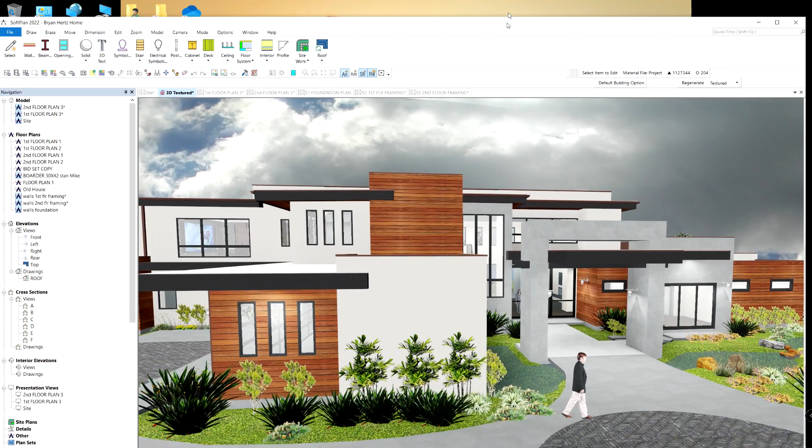So here's the latest. This is changing things back here. This is the last list that you gave me, so I went through it, and I'm going to forego all the fancy lighting just so you can see what we're doing.

We've got those windows. I did finally find a door that I liked there. With this door, it has a man door here, so that's a swing door, but it also slides. I've seen those, a couple of companies make those, but I don't know if your guys do or not.

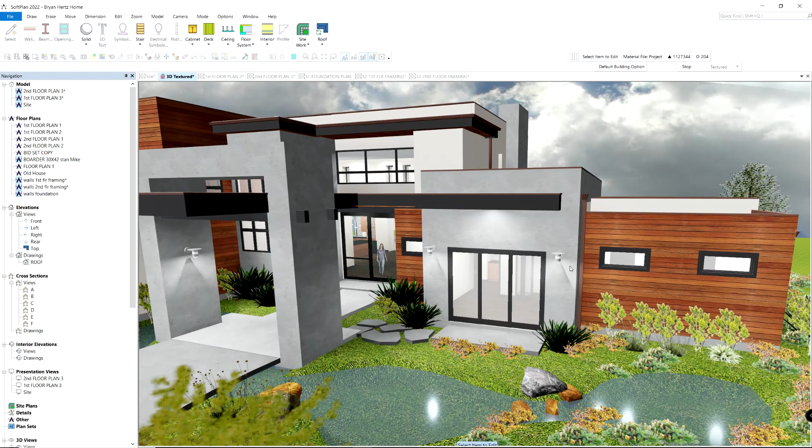And I'm thinking on their window list, it might behoove us to give them elevations that we want, because if they misinterpret how I wrote that down, I don't know what we're going to get. They have no idea what we want in there, really.

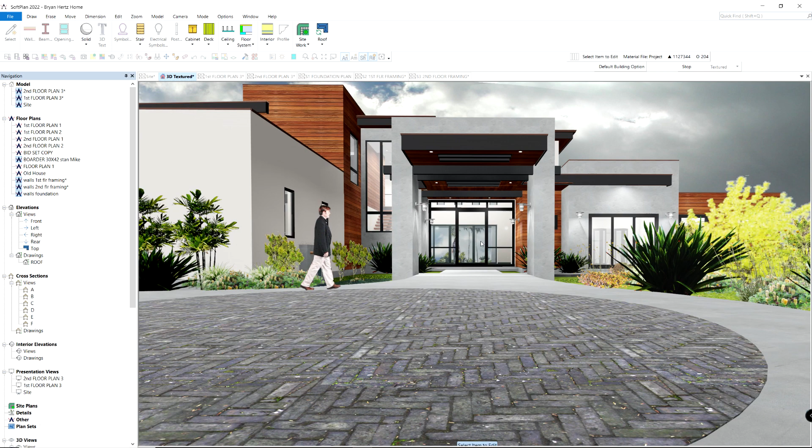I think that we're after something just like that. These two are awnings on the side here, so you get some kind of airflow through there. You've got your pivot door, and then up above you got fix, fix, fix, so these panels go through. And that's what gives us this header for this door here.

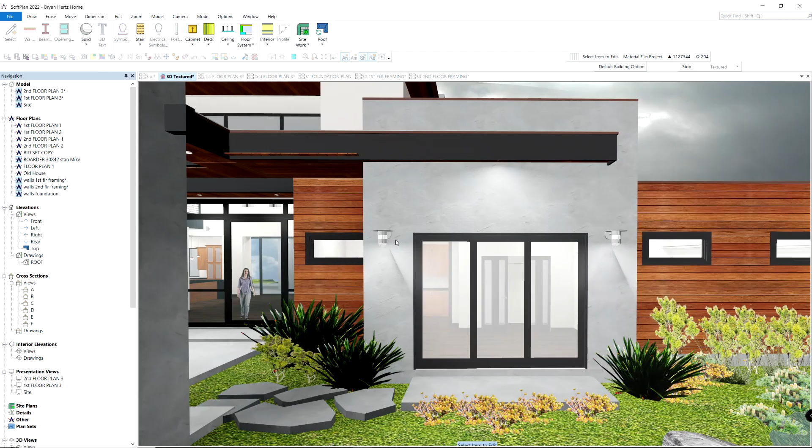I can do that. It would wind up on a separate sheet, but it might be worth doing, just showing what's a casement, what are going to be these awnings with a fixed window above.

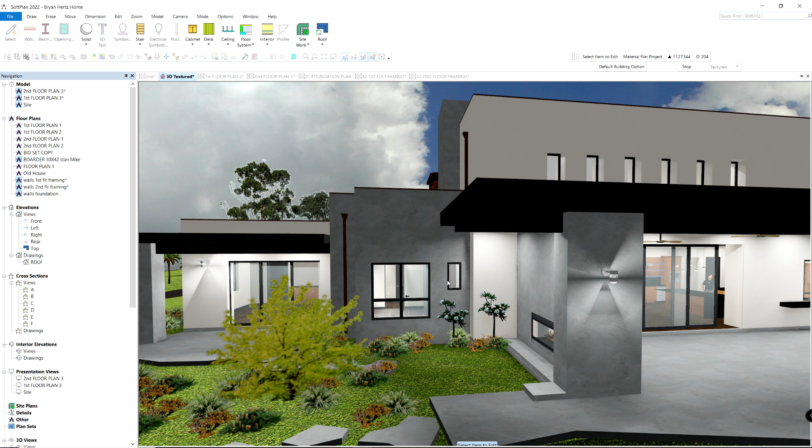Anyway, as we're going around here, hope you're noticing the changes. I changed this back, I made that a little more narrow and long, kind of keeping in keeping with what we've been doing. I think that looks good.

I think you and I are pretty much on the same page in most of this stuff. We're starting to get into your head on some of this.

I changed this back, and that works really nice. I like that detail, that's pretty cool.

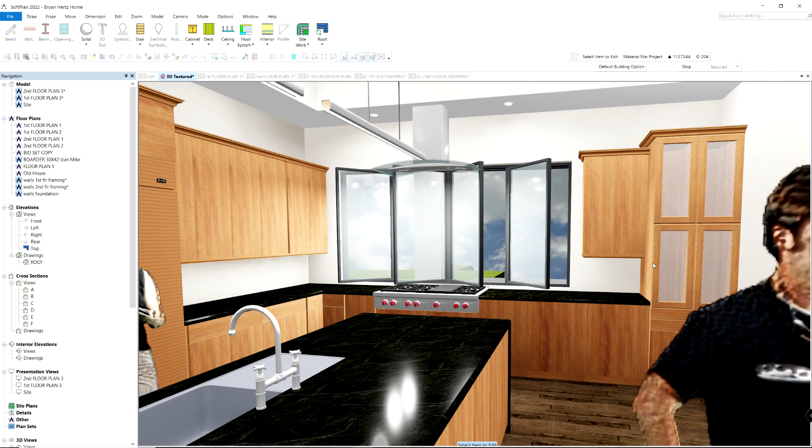So, oh look, my windows are all jacked up there. I'll have to fix that. But anyway...

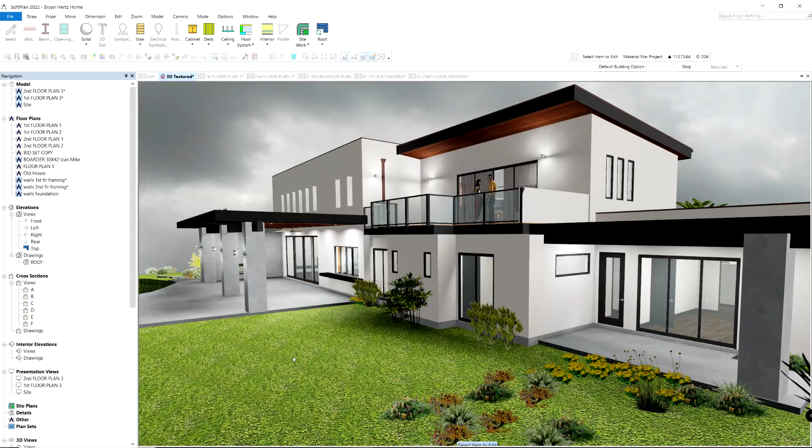Windows and doors back here. I got rid of the exercise yoga room just for now, just for this stuff. All these windows and doors, same, no change other than what we had talked about.

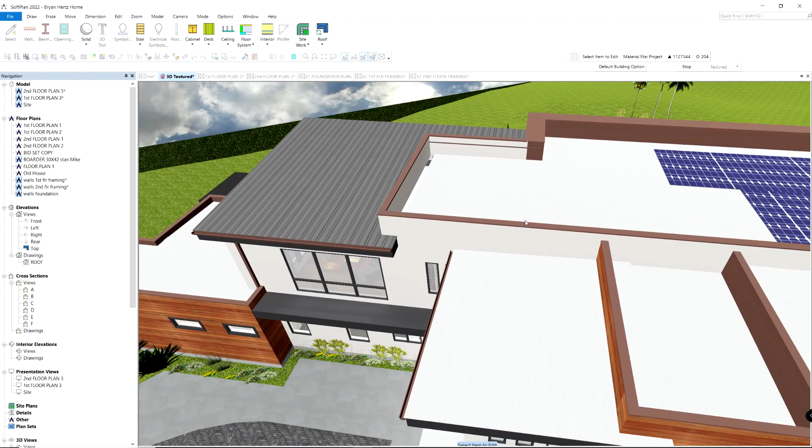So the deck area that I'm talking about—first of all, I like the way that this works, so I really don't want to change this. But here's the area that I'm thinking about converting to deck, and it's just right over this area right here.

So this would have a wall on it, this would be your deck area. If we wanted to make that bigger, well, you probably have to bring this wall out over this, or else it's going to look funny if it breaks in the center of that.

So here, let's see if I can move it. I don't think I can. I think I have to get in and redo it. Yeah, nothing drug with it. Let me see. Well, that's good enough to give you an idea.

And then you take this eyebrow—do you leave the eyebrow? It's too long to leave. I don't like breaking it over the middle of the window.

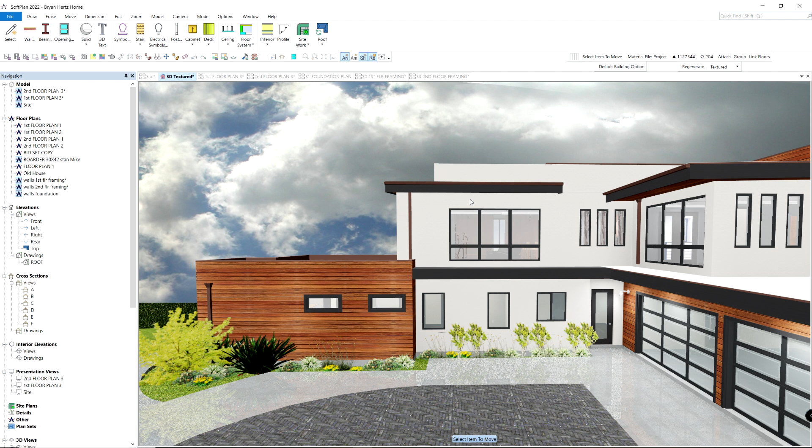Actually, I think to make this work, that deck, I'd have to come over this interior wall here, so this would be more like... come on... like that. And this, I can't move that without doing a whole bunch of hocus pocus, but yeah, I could stop that there.

I think it looks silly though. It's not substantial enough to really work. But with that, I could give you this whole area for a deck.

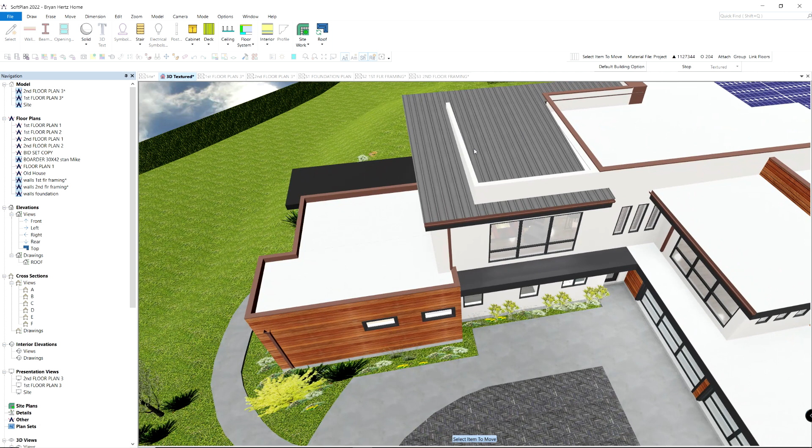And what's that going to do to us going down through there? So as you're doing this, there's your second floor framing I'm working on. So we're talking about bringing this deck over this whole area here.

Well, now you've got a wall here and a wall here and a wall here and a wall here that will support that deck up there. But you have to take those bearing points all the way through, all the way down to the foundation.

So we go to the first floor, which I'm just starting to lay out. This is the area that we're talking about right here. And that deck sits something like right about here. Let me just give you a graphic. So that deck is sitting right about here.

The difficulty I see of getting this down through, it doesn't have to line up perfectly, but I'd have to put a big beam in here, and then I've got to shear it off of this and this. That's not going to give me anything there. And I'm going to have to make that a shear wall anyway, at least a footing wall, because we've got this cantilever over here we've got to run these across from.

So big beams here that are holding up this outside wall. That's a big shear wall, but it doesn't transfer through. It transfers back here and here. Boy, I don't know. That's going to be a question for the engineer. I'm going to have to get him to take a peek at that.

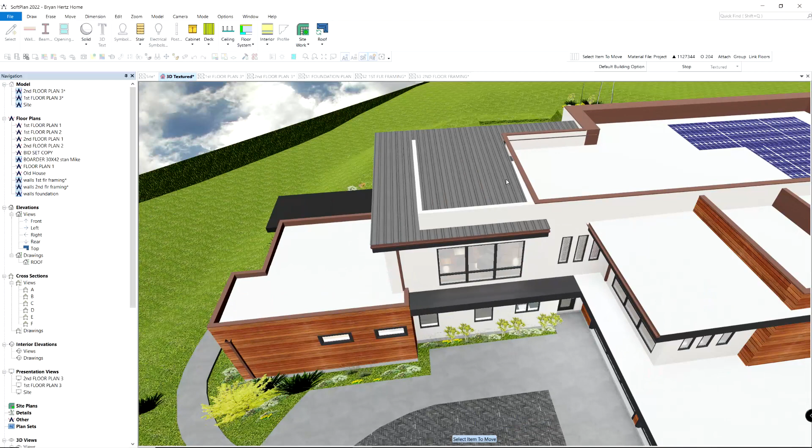That whole area, and the foundation coming down through, I'd say you're gonna spend 30 grand. That's not, I mean, that's with the structural stuff the engineer has to do, the actual footings you got to put in, the bearing points and the shear upgrades.

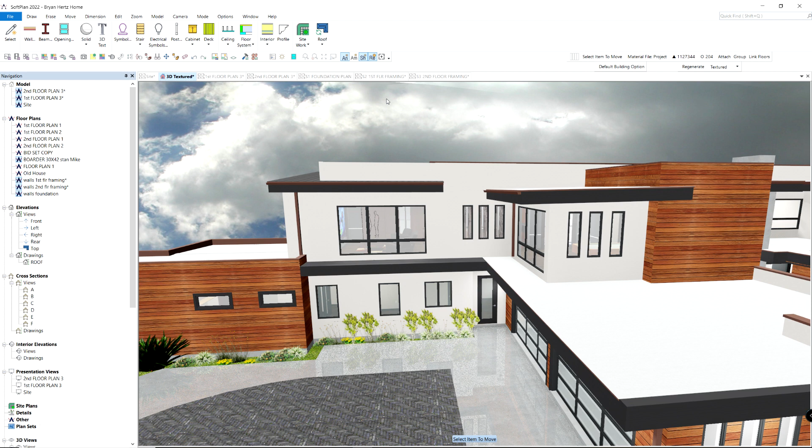Because like I said, he has to look at this as a third story. So when you're in a shaker, that doubles what this has got to take care of down here. It triples this, doubles this, because they're figuring a whole floor up above there.

I'd say it can be done. I think you're going to spend, sheesh, yeah, 25,000. If it can be done, 20 to 25,000 to get it to where you could do it in the future.

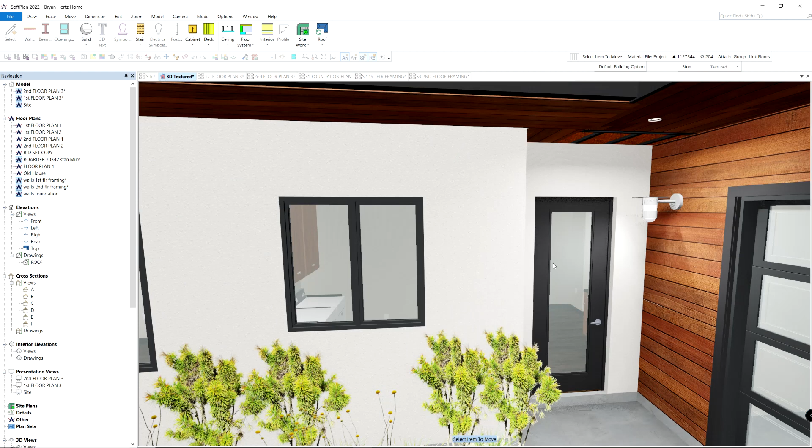Let me know if you think it's worth it, because that's a pretty big change right now. That's going to affect everything I'm doing as far as the structural stuff. And I've got to screw around with these elevations to see if it's going to work.

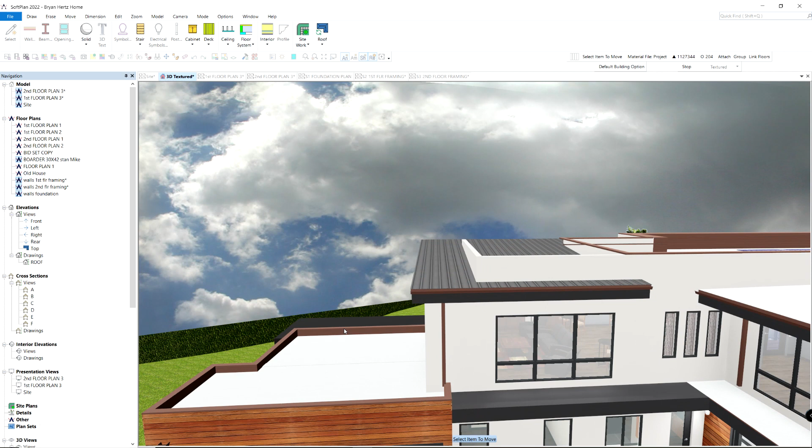I really don't like that. Here, let me try and put this back here.

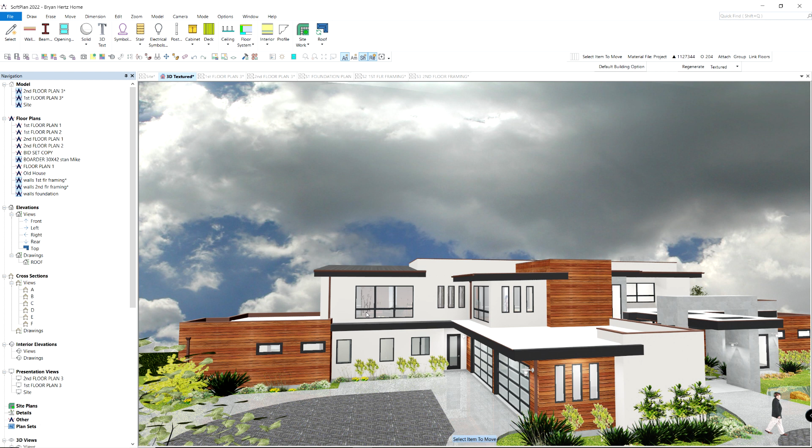What else could we do there? If that works with that, maybe we move this window and move these over. Move this down. I don't know. Anyway, that's where we're at.

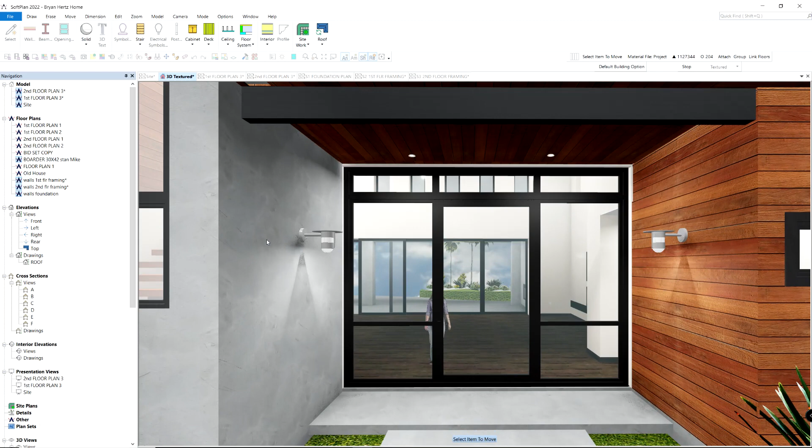Left the big window, I just threw some stuff in here for lighting. I like it, it's really coming along. There's your pool.

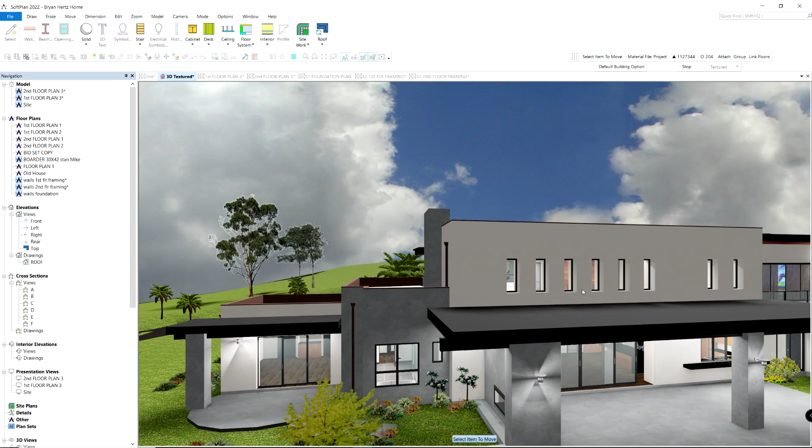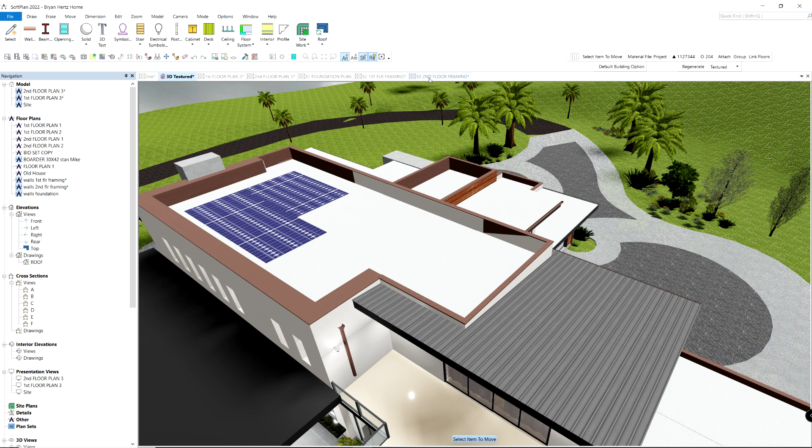Got this nice deck area here that, yeah, I know you want something up in here. I think this is your best bet. If you want to make this bigger than this area, so if we're looking at the second floor framing area, we're talking about this area right here. This would be the area I'm talking about without changing anything, but I'm not sure if we can make this work right here.

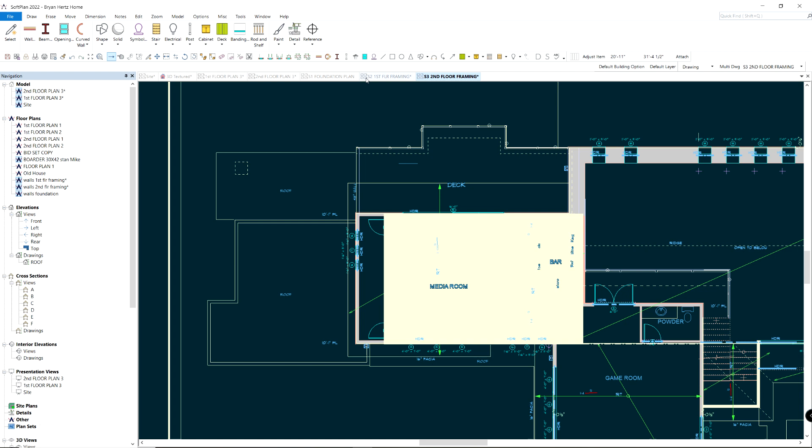That the engineer would have to look at. Yeah, maybe we could, maybe we're not breaking a surface here because I've got to sheet this and sheet this. He'd still use these to support it, but I have to run it by him. If you want to make it bigger, I think we get rid of the problem of breaking these two surfaces. But then the problem becomes this big area - how are we going to get it to transfer down through the building and work?

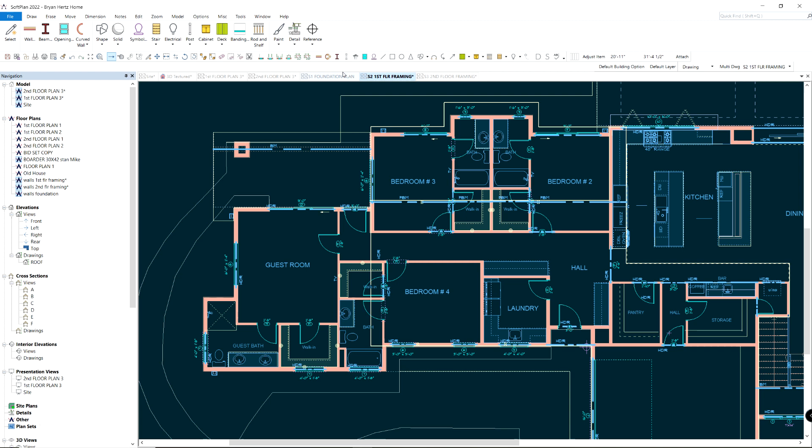Here I think I can transfer it no problem. I mean, well, I shouldn't say that - that's going to be the engineer's call. Yeah, let me know.

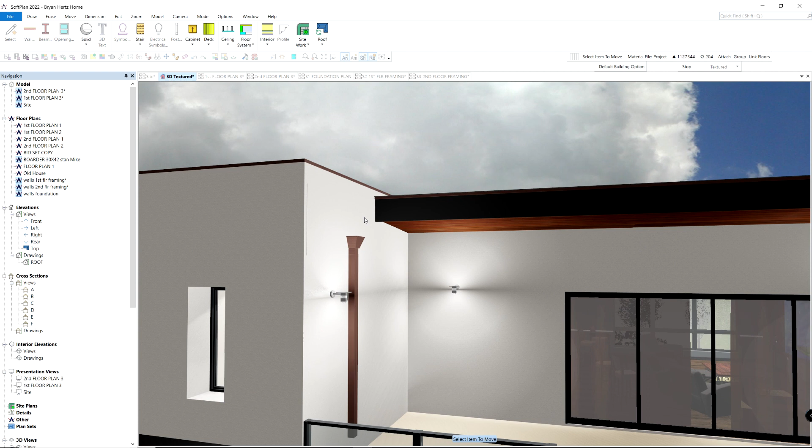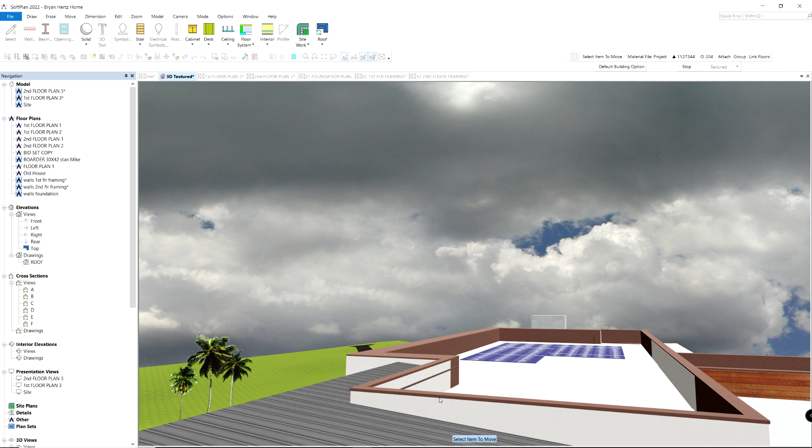Probably put a stairway in here, it goes up here. You could do a spiral - those are pretty dangerous, but I've done them before for roof decks. Actually, the guy that had the jacuzzi up top, he had a spiral. So you'd have a wall going across there, and these would have to be higher walls here to accommodate the railing. Railing has to be 42 inches, so you could either add on top of that, or it's probably how I'd do it, because you've got to have these for the roofing to work. So you'd add a bar or some type of railing on top of that, or glass, however you wanted to do it.

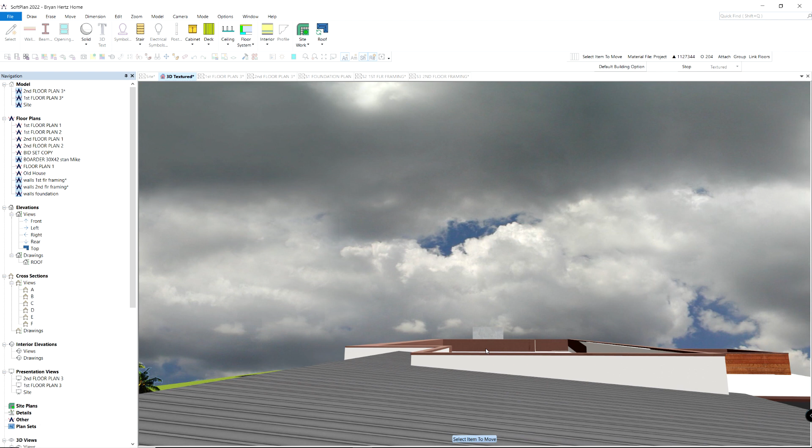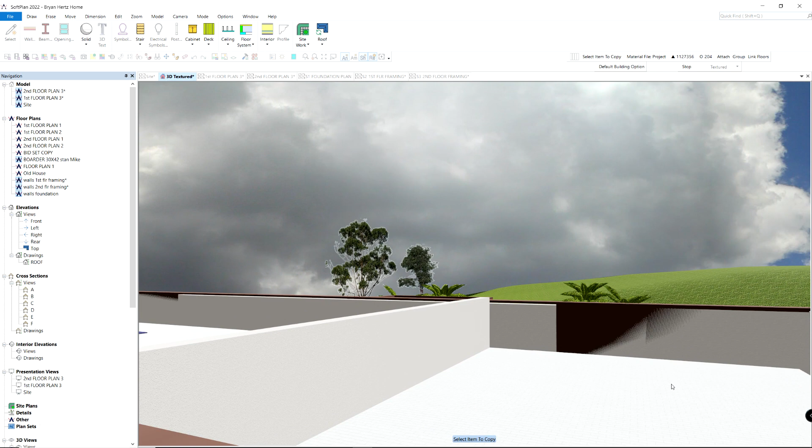So we're here, let's see if I can just do this real quick. We are talking about that as far as a roof deck - it's 16 by 20. Let me know.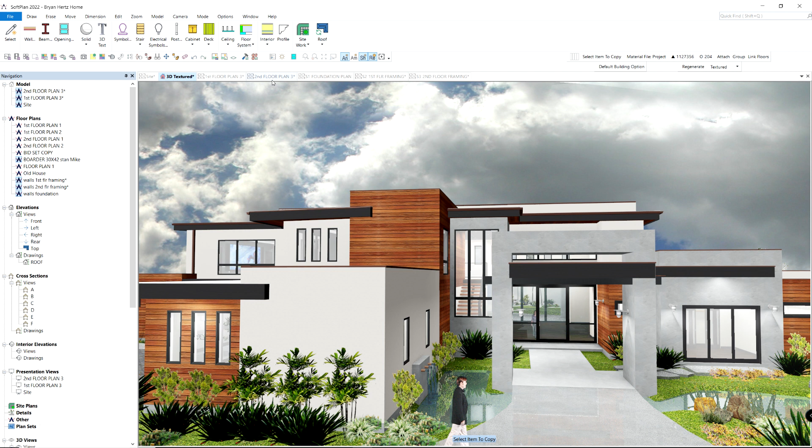Oh, your question about bathrooms and plumbing - take a look at the bathrooms. I'll send you over the latest. Well, I already did, I sent this over - look at that last one I sent over, floor plans. The thing that people always change in these is the tubs, they want showers instead of tubs or tubs instead of showers. I've just put tubs in all of these.

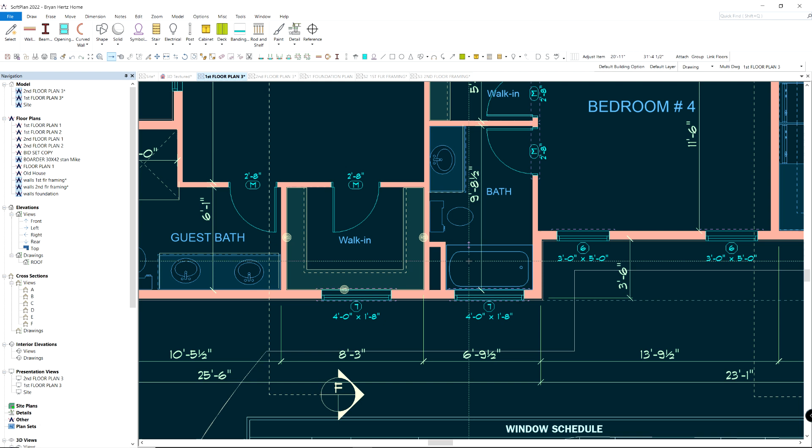Shower's a little more expensive and it takes a little more room, so if we went with a shower here, that shower would push this and squeeze these. I'd probably have to shrink those a little bit, but those are tub shower combinations. Over here, tub shower combination. This is just a shower in this one. I don't know if you need double sinks in this - a single would probably do just fine.

We talked about the laundry. And then over here we've got everything - we got a nice big steam shower. If you're going to still do the steam thing, I can fit that in under the seat here, the steam unit, and put a hatch over in this bathroom toilet area to get to that.

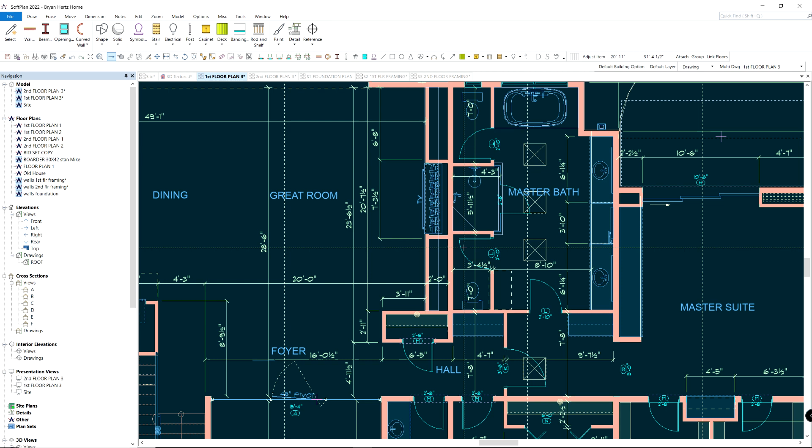So I think that's it, I think we're good on everything else. Upstairs, we just have that powder room, and somehow I erased a wall. If you wanted to add a shower in here or something, let me know.

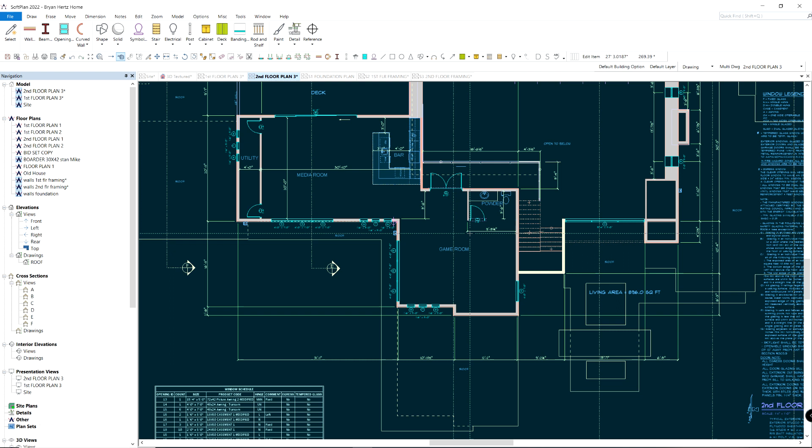Maybe I could expand this a little bit, and it gives you the option of making that a bedroom. But the overflow room, I don't know - this is all open, I don't think you want to mess with that. So, okay, let me know what you want to do with that.

How do I turn this off?